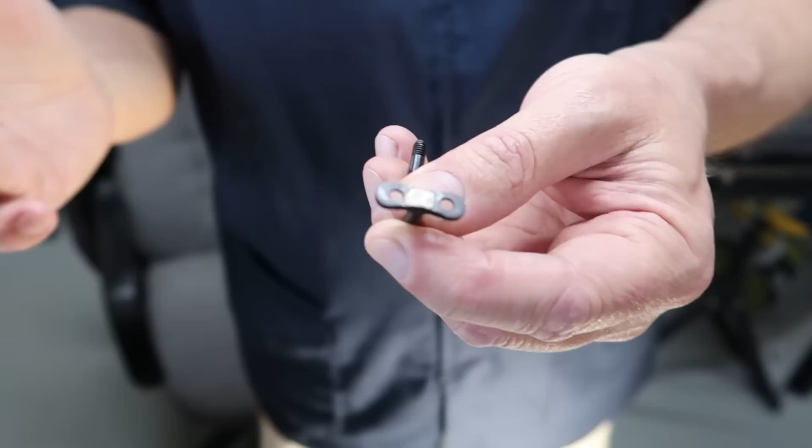So Pat fusses around with some welding brace or whatever it is, firing on it and firing on it. I thought he was going to catch my bench on fire out here. It was so hot, but nothing was working. Don't want to heat up too much. You can always try it again, you know.

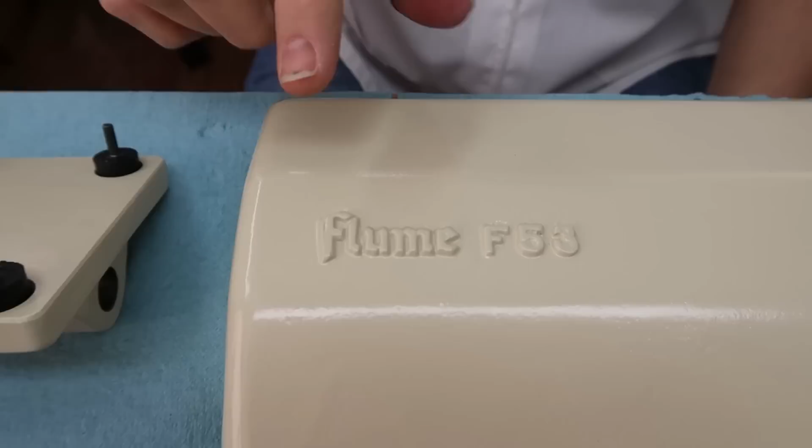Lance has a skill which I don't have, where he's able to paint these embossed letters really well. Patrick saw this first today and said, 'Oh look, we should have filmed this in October.' Boo!

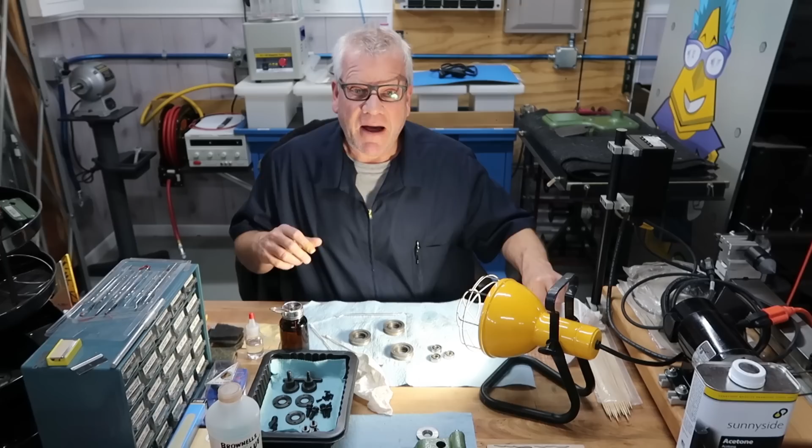Okay, let's see what Lance is up to today. Hey, hi, welcome back. He says you're going to stop by out here. We're going to go over a few things. It's time for a little bit of an update on the progress report for the week here.

Okay, I want to give a little update on some things that's going on. We're always fussing around rebuilding some machines. What's going on? Well, here's what it is. We've been running these machines, doing work for other people for a very long time. Now that we're going to start making our own product, it was time to stop. Actually have the time because we're not being pressed for schedules as much, but we still need to get a product to market, and we're going to build our own product. So this was a big deal to us.

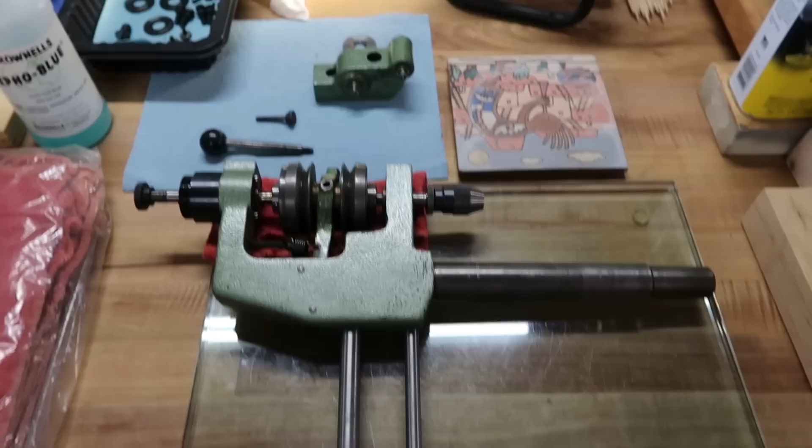In front of me today I have a German - I know, I have another German machine. Look, Patrick buys these things, not me. I'm lucky I'm allowed to touch them. And Levin didn't make one, unfortunately, or we would have it. This is a German-made one. Pat's going to put up the name of it on the screen because there's no way in the world I'm going to speak that kind of German. It's like four words with a big U in the middle. I have no idea, no disrespect.

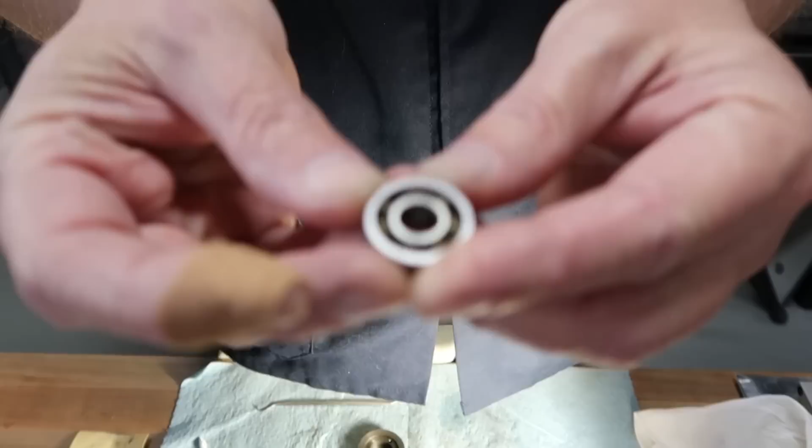This is a micro tapping machine. This is the head of it. He'll put a picture of the machine up as I took it from him to begin the process of restoring it. We're not painting it, we're just going to polish up some things with some Scotch-Brite. We're going to replace all the bearings. We got these out - these are old Fag bearings. They haven't made these for a very long time, so these are obviously pretty close to damn near originals.

So it was time, we've pushed it for all it's worth, and we're making our own new product here. We want our machines to do the absolute best drilling, like the micro drill, and the absolute best tapping. Remember, all these old machines we're fixing up are going to make the product we'll be offering through our website, probably next year, 2019. No rush, we're just having a good time getting to know people on YouTube and enjoying rebuilding all these machines.

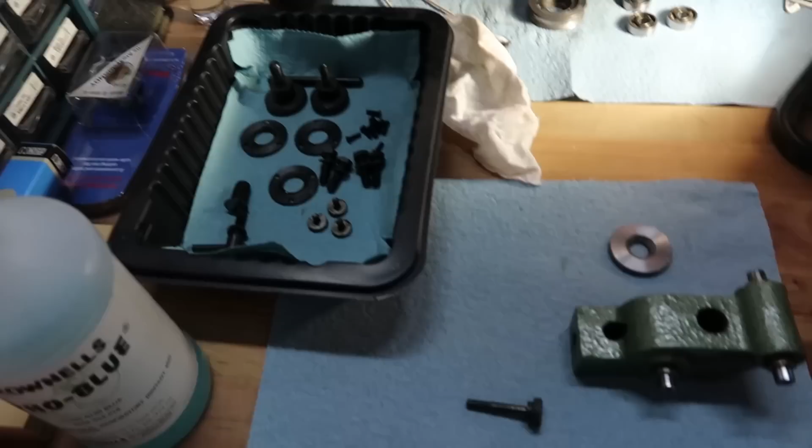So this is what happens. Things come to me, Patrick gives me the project, I start disassembling. Bearings are popped out, parts are everywhere, bearings are on order. It's really amazing.

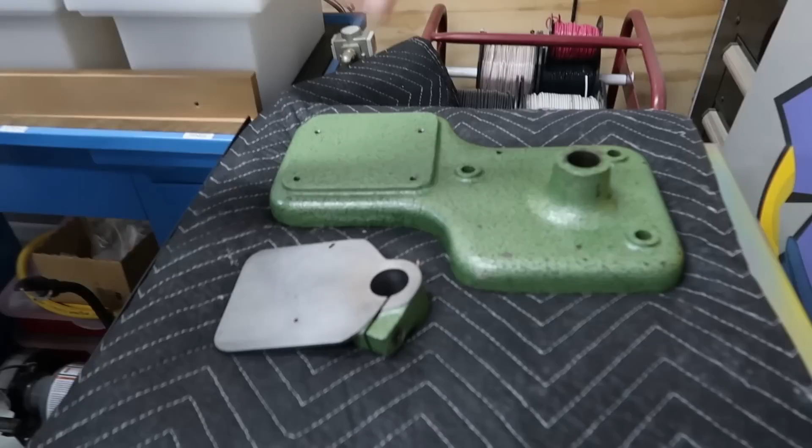Back over here, here's the drill, here's my drill base plate. That goes on the column there. This is my big base plate. Of course, you know what's going to happen here, huh?

See these three holes? I'm going to mount this to another one of those fabulous cutting boards, they call it, although I like to call it a work table board. One of these small boards again, another 12 by 18. It actually fits, I'm waiting for it to come in. I'm going to put the little rubber feet again like we always do, and I'm going to give this machine back to Pat, tapping perfect holes.

We ran into a new problem. It's not new, it's happened to us before, but we get into these spindles. Let me come back to Pat here in the spindle. It's got this quick chuck on the front. We've disassembled it, it's all unscrewed. You think, oh wow, just knock it on out of there, no problem. Oh I know, let's use this like a puller and smash it till this thing pops off.

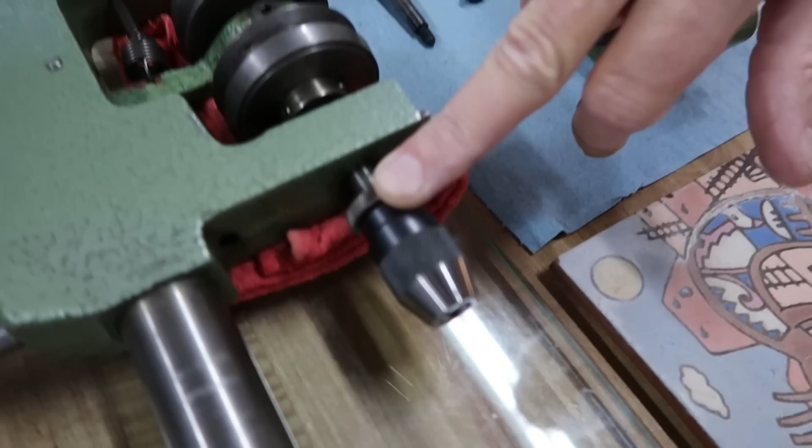We've been here before, here's what's going to have to happen. This is machined, there's a step in here, it's not going to come out this way, so it all has to come out backward. The only way to do that is to take this off. We have all those pullers, as you've seen in prior videos, if you had the opportunity to see them. If not, go back and watch them. It's a pretty interesting way about how we pull the bearings on a Barker mill.

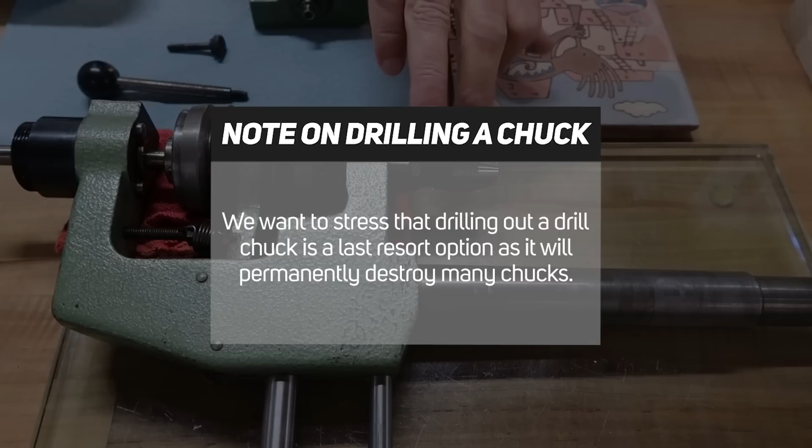So what we're going to do is open this up. We're going to come in and drill this front end here, and then we're going to be able to get this chuck off of here and pull this apart, and we'll start the cleaning up, rebuilding process.

This is that oilite bronze bushing again, no oilers. So I guess we've just been oiling from the top all of our years, but now that we're so into this, we're trying to pay attention to it. Okay, but that's all we got there.

Now I just wanted to share another something with you. Maybe you're just not aware because all you see is a cute little 30-minute video of the two of us telling you and showing the things we'd like to share with you. I'm going to share just one part from a Flume motor. This is one of the two brothers of motors that Patrick's rebuilding right now. In fact, we're going to go to him just real quickly for another update from him when I'm done.

But here's a part for that Flume motor. He brings it out to me and it's in two pieces. So Pat fusses around with some welding brace or whatever it is, and he's firing on it. I thought he was going to catch my bench on fire out here, it was so hot, but nothing was working. This piece wasn't connecting to that piece, nothing was happening. So he dropped back to his tried and true ways of the proper solder.

We're just assuming the solder he tried to use here was probably a California approved product, so I think we used an out-of-state version, and of course it's completely perfect. Okay, so that takes about an hour for Pat to prep these two parts, get them angled perfectly, and solder these two parts. We didn't film it, we probably should have. It's also bent. And it was bent, yeah, it's bent all over the planet.

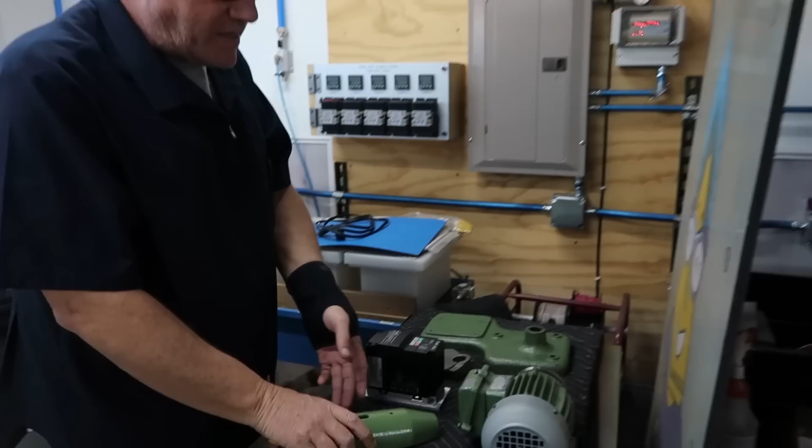I wanted to share a little bit more about this tapping machine. You know, it's beautiful, and Pat's going to put the name up, but we've gone through it. Here we go, a little more. You know, and we said we didn't paint it - we did just one part. We painted one piece, it's a front cover plate. It sits in front, just because, I don't know, we were painting German green that day anyway.

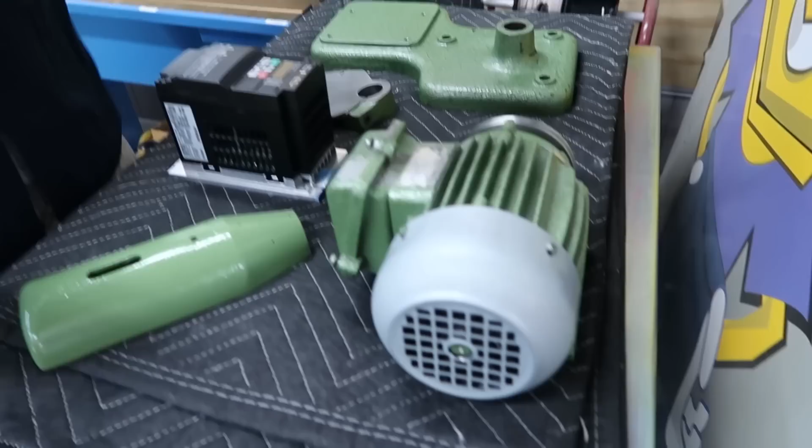Right, this is a motor we forgot to mention. Pat put a lot of hours in it. I found this cover in Germany, actually, from a new manufacturer - couldn't believe it. It had altered a little bit, but it fits. Yeah, the original was plastic, and it just cracked, and it's a beautiful metal one. Yeah, it's metal now. So this motor runs on 3-phase power.

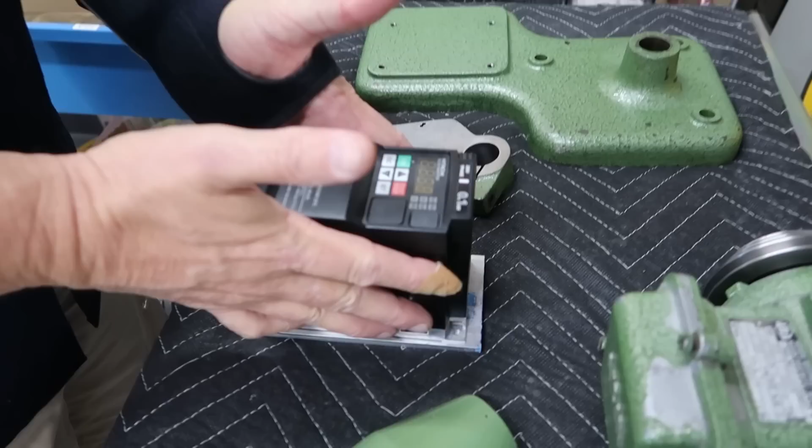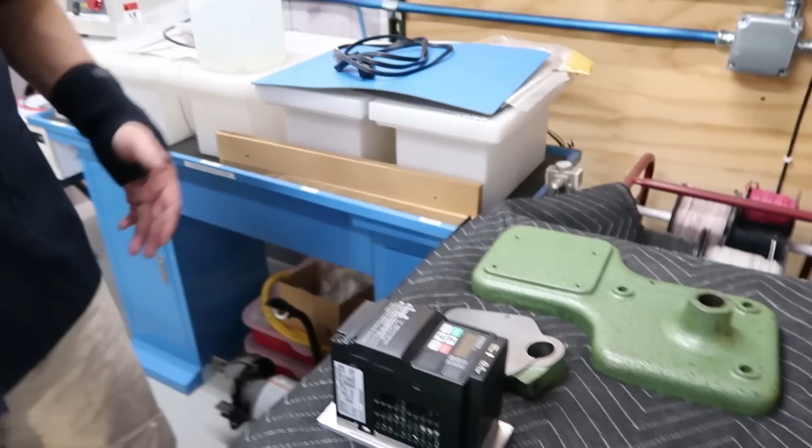Now, we're not going to run it on 3-phase power. By the way, I don't know if you know, we have 400 amp 3-phase service here. I have a beautiful Christmas tree with 3 ornaments on it, better known as 3 transformers. So we do have full 3-phase power on the property. The thing is, in this case, this motor, we're going to run it on just a single phase because we have this - we want to run the VFD, and this is going to allow us to control the variable speeds and give us the speed controls for the motor. So we didn't need that situation here, but we wanted to let you know we do have that 3-phase power for a big future machine we plan to have one day.

So that's what we're here working for. And did I miss anything, Pat? No, I think that's it. So this is everything that goes to - so this is a nice, powerful, and strong tapping machine. It may be a micro scale, but it's got a lot of power. So we're really excited about it.

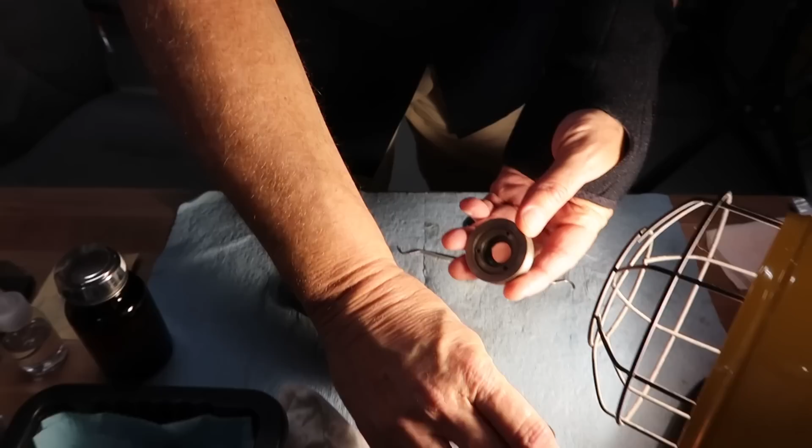Yeah, I'm still cleaning parts. What are these parts here? Well, these are idler pulleys, and these are the ones we pulled the bearings out of. It's only 3 for the belt to ride around, the famous green belt, the fused belts. And that's what these came out of, and I'm just going to clean these up. We got the other bearings to change and all that, but yeah, it's going to be really good.

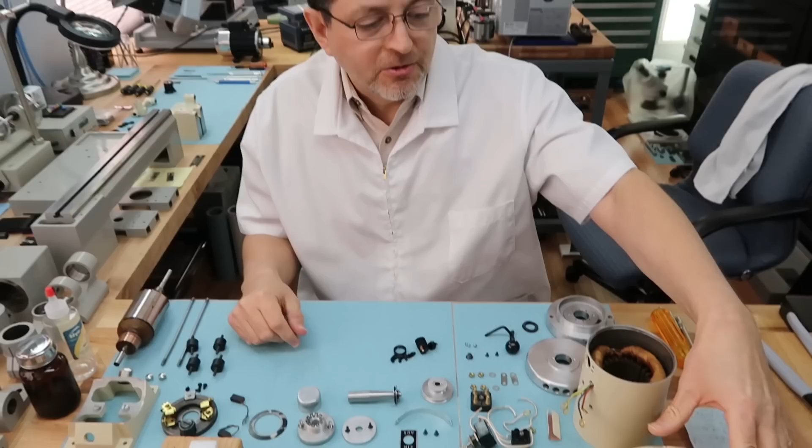Hello, everybody, and we're back to see Patrick about a couple of Flume motors, shall we? Hi, Patrick. Hi. Okay, yeah, if you notice in prior videos, we were working on this Flume Watchmaker base. And if you notice, we did the painting, and we also did a little restoration on the parts.

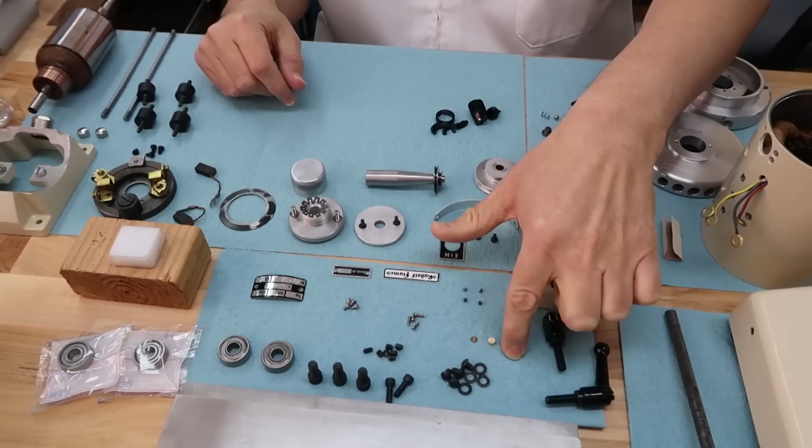We added new handles and made some spacers that we saw were missing. That's actually completed the base itself. The last part is the motor, and that's what I'm working on this week. I just started today, and we're hoping to have it done in about the next day or so, so we can share it with you by the end of the week.

This motor looks more like one of those model kits, look at all those parts. Yeah, this is the most complicated motor we've ever worked on. This is all mechanical, there's no electronics or speed control, and it's a really unique motor.

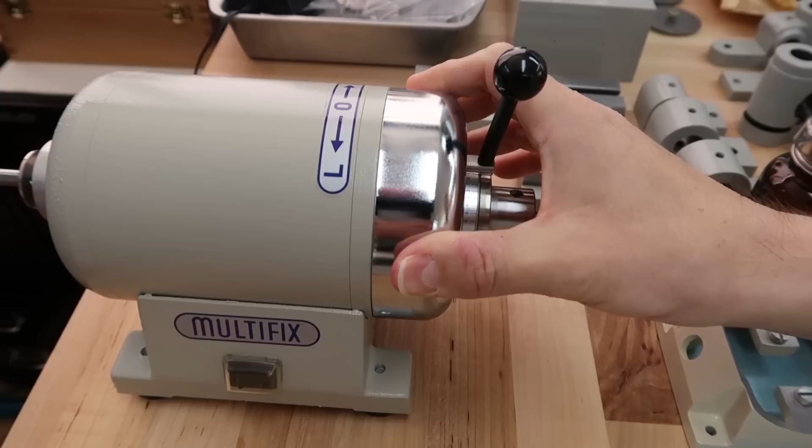The type is a repulsion motor, which is a single phase AC motor. I want to show you an example. This is the same type of motor, just the Flume, which we figure is about 35-40 years old. This is a newer model you can buy today from Bergeon, called the Multifix. It's made in Germany, and what makes this motor really unique is it has speed control, done mechanically with no electronics.

What's nice is it has neutral, like here, and it has forward and reverse. Let me turn it on so you can see it in action.

So we move it forward, and that's moving it this way, counterclockwise with me facing the shaft. It goes pretty fast, I think 5,000 RPMs. Wow.

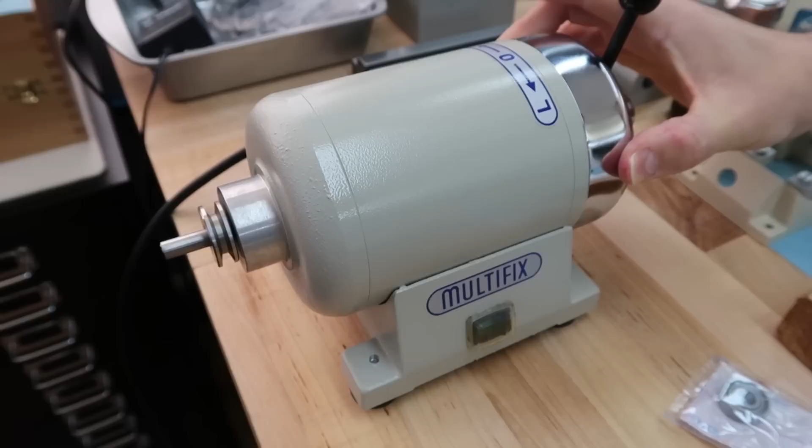What's really unique about this, you'd think a single phase AC motor wouldn't have much torque on the low RPM side. But that's what's unique about this motor, it has really good low end torque for low RPMs, and it's really smooth. You could hear it, it just sounds great. And it's really easy to control.

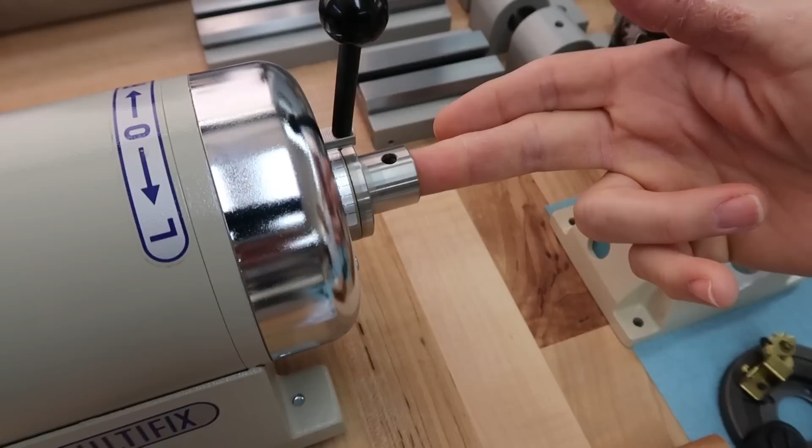It's really nice. The reason there are two shafts is this shaft you'd use to drive your little watchmaker lathe, and this is an accessory shaft. They make accessories, like arbors you could attach here if you want to do grinding or buffing, and you can actually plug in a flex shaft. Yeah, those are neat. We have all the accessories, so I'll have to show them to you in another video.

I just wanted to share that. Sounds like some more stuff I haven't seen around here, huh? Busted, I like this video recording, I get some confessions, it's what they call true confessions. Okay, I'm sorry, back to Patrick.

Yeah, so it's a really unique type of motor. But there is an interesting story about this Flume. Let's come back to the Flume. This has actually been in storage for about 15 years.

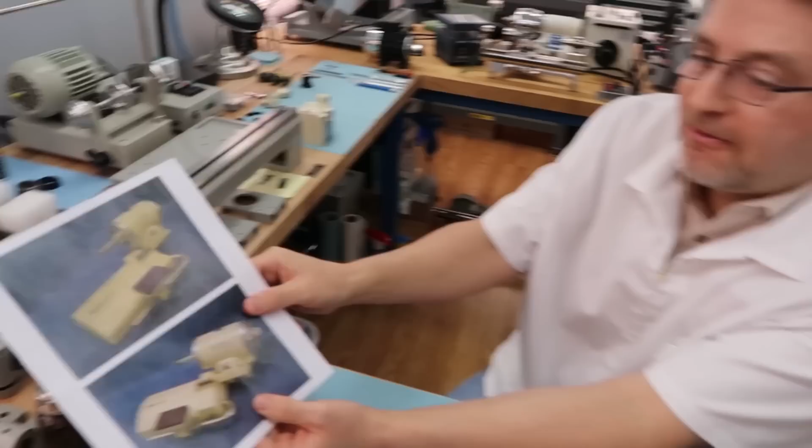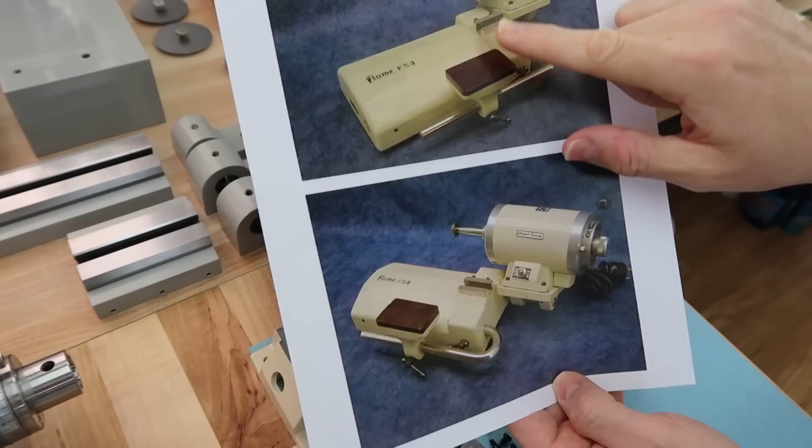We purchased it and ran into an incident, a kind of sad story, but I wanted to share it with you. When we bought this about 15 years ago, these are the photos the seller sent me from Germany. As you can see, for its age it's in immaculate condition, just beautiful. The motor, the base, you've got your little hand rest for working on the lathe. See, the lathe is secured right here, really nice. You can see the close-ups, look at the motor, just beautiful condition for its age.

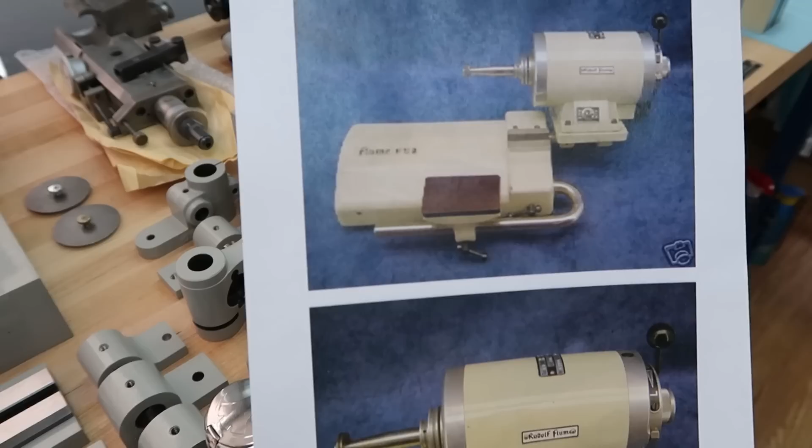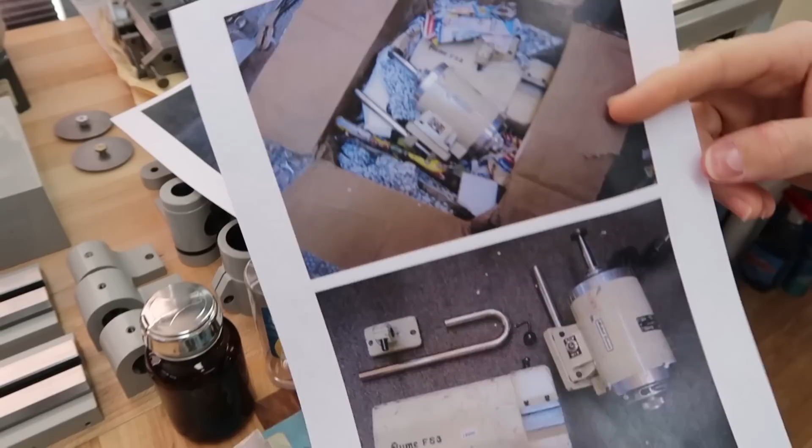But the disaster came when it arrived to us. We were just devastated. The seller didn't spend any time packing it, all he did was throw all the parts in a box with some pieces of newspaper and some foam. Well, that certainly isn't very German-like. Yeah, and it just destroyed it.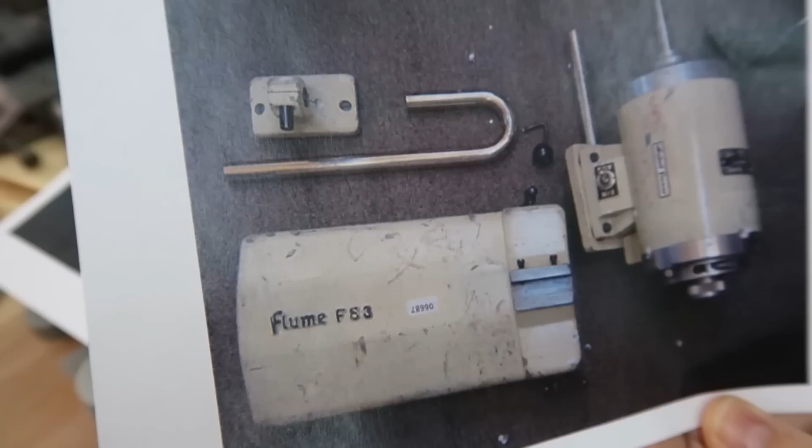Here's a picture of when we removed the parts from the box. Let me show you some close-ups. You can just see it got so banged up, and we were just literally devastated, so devastated. We just packed it back up and put it back in storage, and we just didn't want to see it.

The other thing is the seller ignored us, so we had to file a dispute with PayPal. Fortunately, PayPal sided with us because he wouldn't respond to us, or even to PayPal, so we got our money back. But again, it just wasn't right. We were just devastated, this is an old device that you just can't purchase today. It's devastating, but it is true.

Out of the megatons of rare equipment and tools we've acquired for our own shop over the past couple decades, it's only happened twice that shipping damaged something badly. There was a real rare Bulova wall clock, blue and white, that the seller didn't pack well, and it cracked. A devastating experience. But for the most part, sellers really do care and spend the time to pack properly.

Like we say, it only happened twice out of maybe 20,000 shipments. We've had shipments all around the world - Germany, Switzerland, England, Russia, you name it.

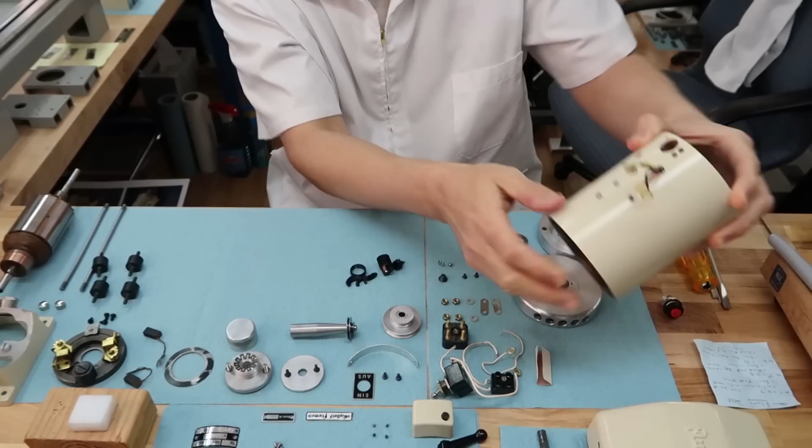So the other thing is, I disassembled the motor. We actually took it apart to paint the housing of the motor, so it looks nice. Those are all the parts I did for you too, by the way. I noticed all the beautiful finishes. Right, so Lance did the parts for me.

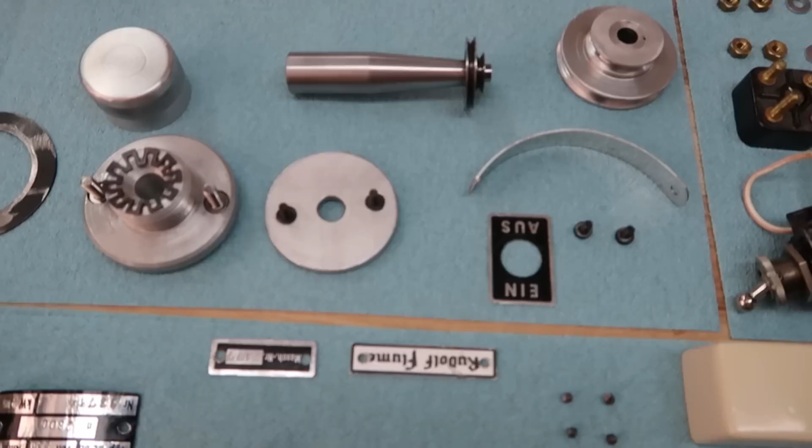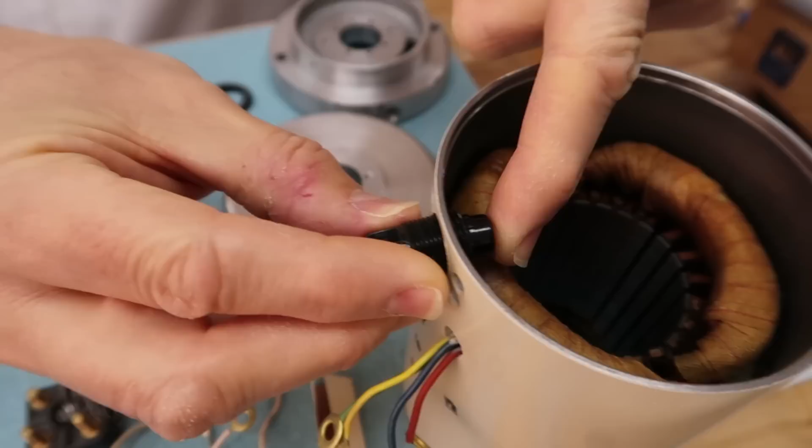When we were going over all the parts, there was a broken part - a little switch. We don't know if it got brittle because of age or if it broke from shipping damage. But the switch actually installs in this motor like this, and when that lever is in neutral, it disengages the power to the motor. So that's the function of this.

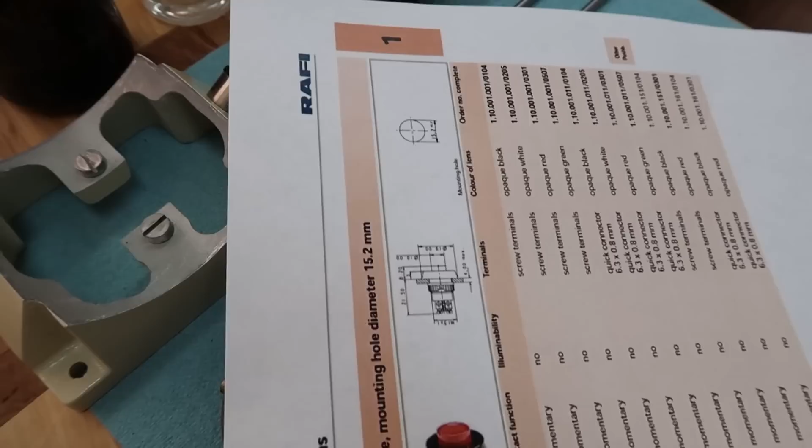My concern was, due to the age of this, I wasn't sure if I could get a replacement. But we were so lucky because I was able to read the manufacturer and the part number, and I found the actual part from a German company called Rafi. They make this part in Bulgaria. What's really interesting is I was able to order it through an electronics distributor called Newark, and they have it in stock in their distribution center in England. So it took a little while, but we were able to obtain a replacement.

And here's the replacement - it's an exact match. The only difference is the old button's black and this one's red. That's all they had, but other than that, it's identical.

We were so lucky because we're actually restoring another Flume motor, which we'll show you soon, probably this week. We mentioned in the last video we were doing a pair of brothers - like a set, they're adorable. That one needed a new switch too, not broken like this one but just worn out. Fortunately, when I purchased this part, I bought 4 of them - when you purchase something, you always buy extras. So I have a replacement for the other motor, and now we have 2 extras if we need them. That's it, I think that covers everything.

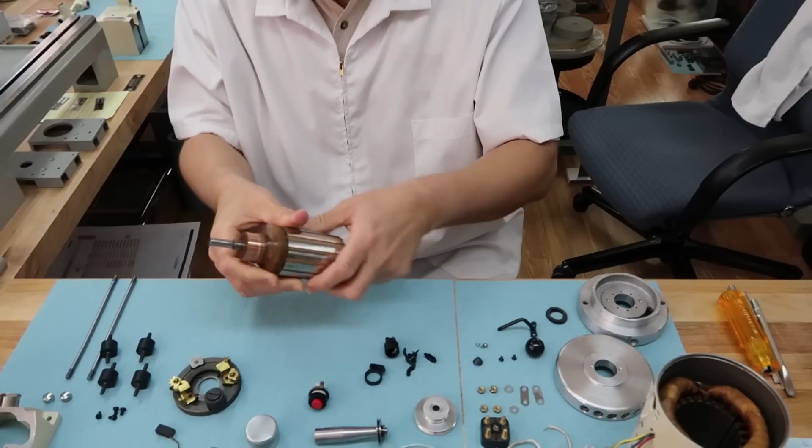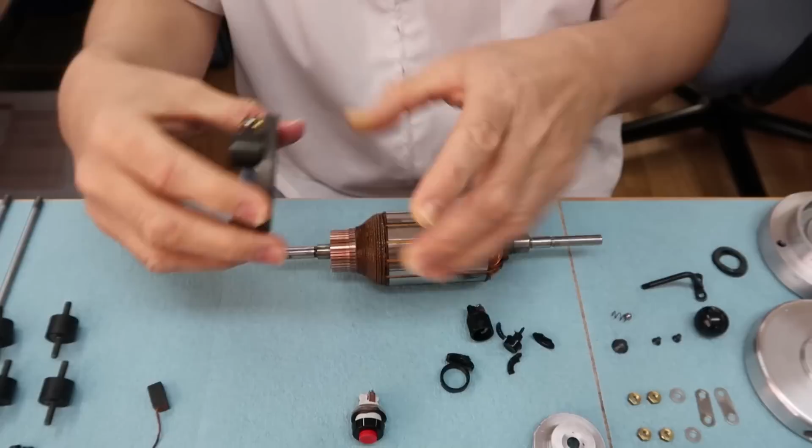Oh, let me show you how the motor works really quickly - just to demonstrate the speed function. Okay, so this is the piece, you've got the carbon brushes, two of them, one on each side. This is what the brushes ride on - the commutator.

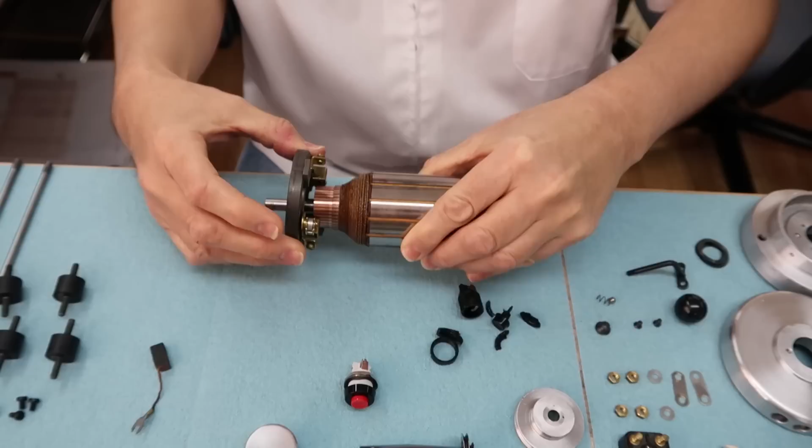What's really interesting, I'm not sure exactly how it works - you'd have to read up on it, it's a really interesting mechanism. But by turning this, it controls the speed and also the direction that this turns. It's all mechanical how this works. So that's how that works, and I think that's about it - as you can see, it's a lot of parts for just a simple motor.

Well, thanks for sharing that, Patrick. That'll make a lot more sense for people when these are all put together - they'll just go 'oh, look, another shiny, pretty motor' but now they know what's inside and what it took to make these, without having one of those controllers. That's nice. Thanks, Patrick. Sure, be back later. Okay, bye.

Hey, hi, I thought we'd jump in and give you a slight update on the German tapping machine - you'll notice there's a big torch in front of me here.

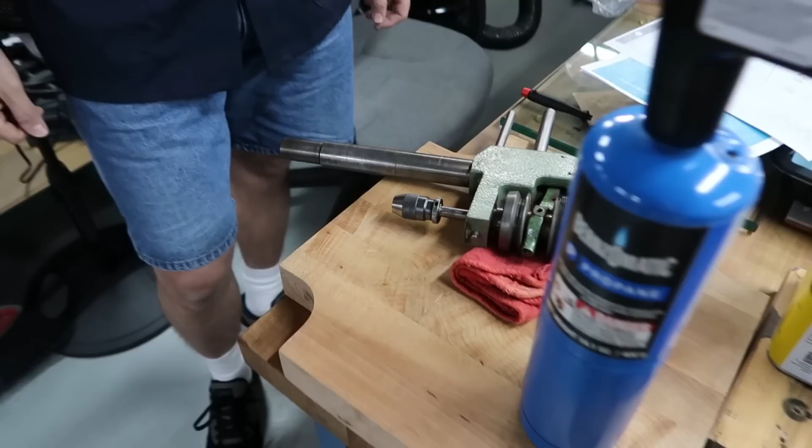We were trying to figure out how to get the Albrecht chuck out of this thing. We want to save this little chuck. We didn't know if this was screwed in or tapered, and Patrick did what he usually does.

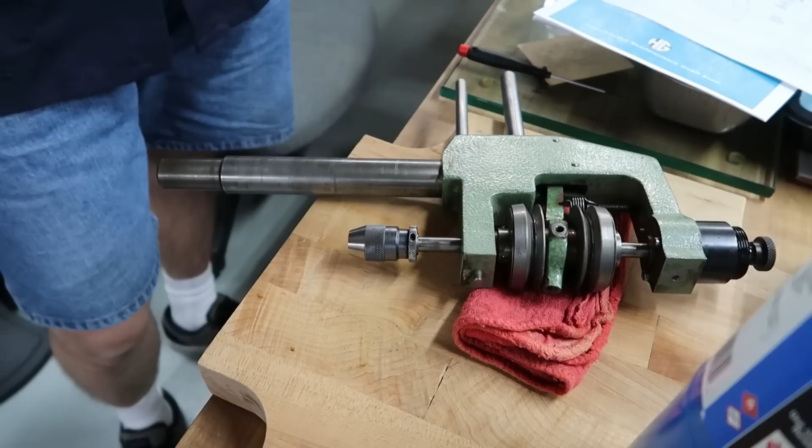We always try to contact companies, all the time. There's a couple companies that are great with us - one of them is Levin and Son, and the other was this German company here, which he'll put the name up on like we've said before. Here's the name of the company. That's who made this machine.

Well, he was lucky - last night Patrick contacted the company, so he's going to tell you a little bit about that. We're going to try to use heat here. I thought he already did, and that's why I'm sitting out here working today on the parts, and he comes out with this big torch, all jumping up and down. So we're going to try to get this chuck out of here, and Pat's going to explain what they sent him.

Hi Patrick. What I did was email the company last night because our night is Germany's morning. I thought, okay, it's a long shot because we've contacted a lot of companies in the past and get a lot of no responses, but you always have to try. So I sent them a kind email saying I have this old model of tapping machine that they made a while back.

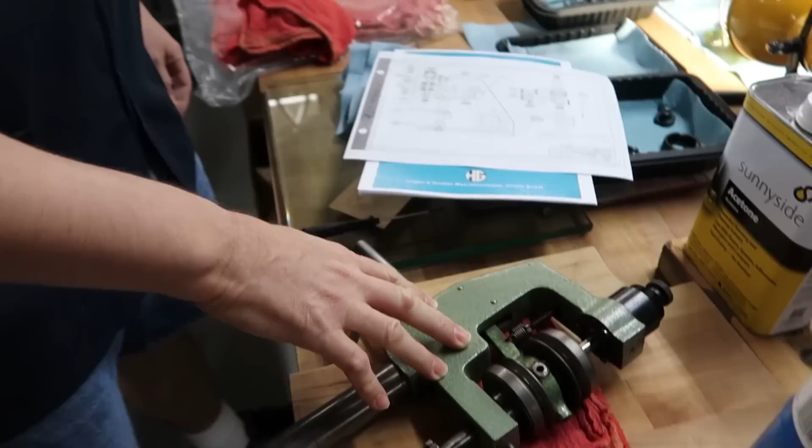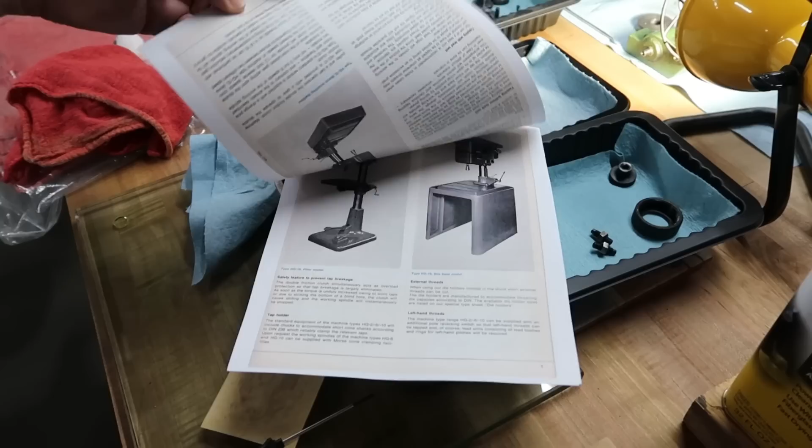I asked them really politely if they have any documentation, a user's manual, a parts diagram, anything to help us do maintenance and restoration on this tapping machine. To my surprise, I checked my email first thing in the morning and they sent me this little user's manual showing the machines and some instructions on its use.

Oh, those are like all their machines from that era, huh? Yeah. The guy even mentioned - he was really surprised, a really nice guy who responded to me - he said 'oh wow, you have an old model of ours,' and he was really happy we were restoring it.

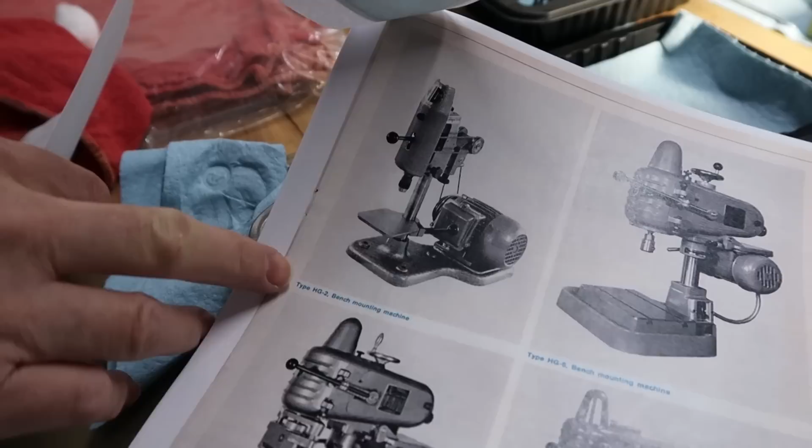Oh yeah, there it is - I see it, look at that. I haven't looked because he just printed this. See, that's the one we own, the HG-2. Well, ours looks just like it - nice, it's exactly like ours. And what was really nice was they also sent us the parts diagram right here.

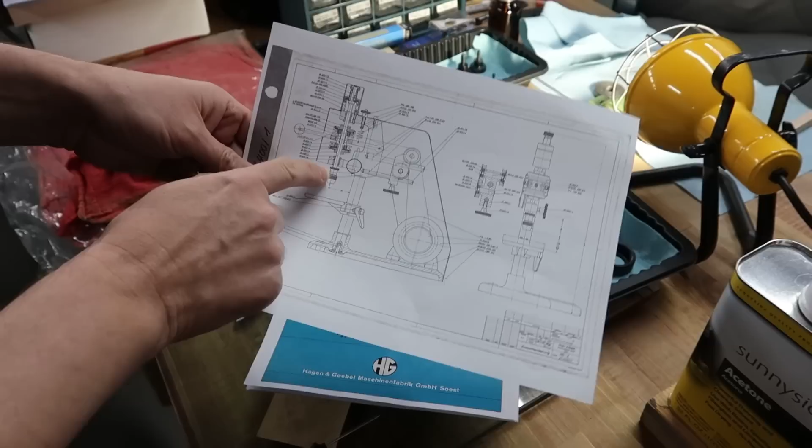One of the things I had asked him was whether the chuck was a taper mount or a screw mount, and that was really important because we don't want to be tapping and pounding on this chuck if it's a screw mount - we've done that before and we'd look pretty dumb.

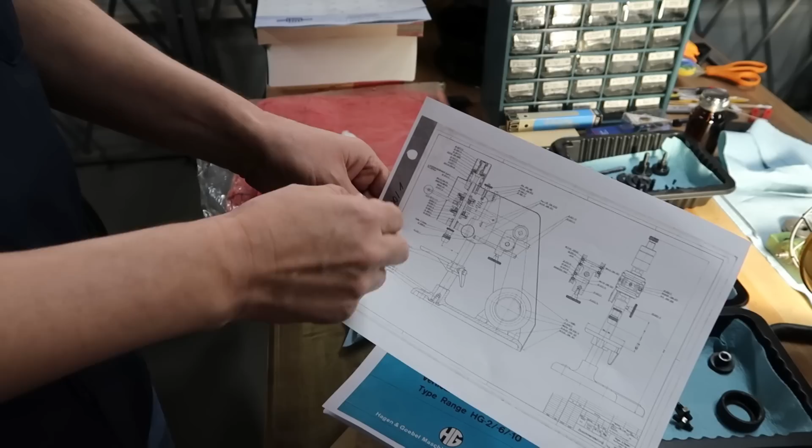So he did confirm, I believe he said it's a B10 taper, because the European or German standards have their own tapers, like we have the Morse taper. Okay, so it's just a small taper - I think it's like a Morse 0 compared to our Morse 1. It's tiny, yeah, it's tiny.

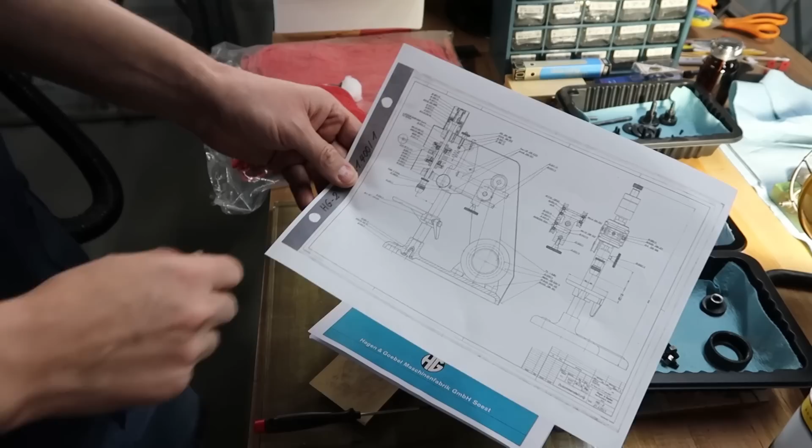Okay, and don't be going Morse 40 on me over here. Like Lance said, this is an Albrecht chuck, actually a 1/8 inch chuck. I think we're gonna try - I talked to the guy, and he mentioned in the email to be sure to remove the screw in the chuck, which I did.

The screw's right here, so I removed it, and he said try applying heat. So this morning I cleaned up really well, put a little bit of penetrating oil, like I always try - anything helps. You completely removed that screw because I can see down the hole, so you did what he told you.

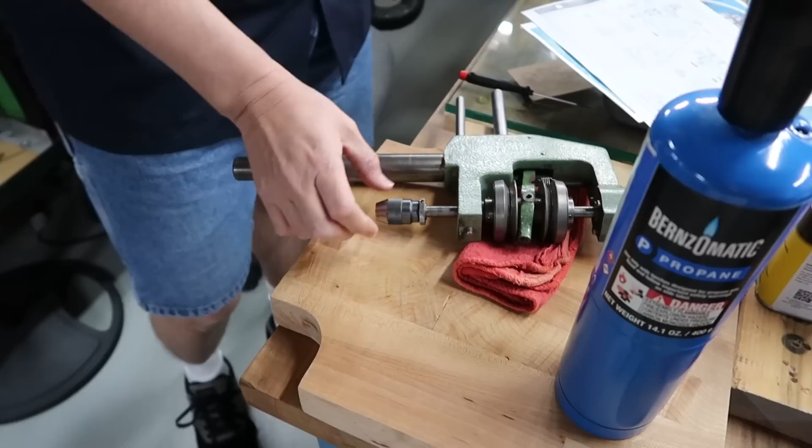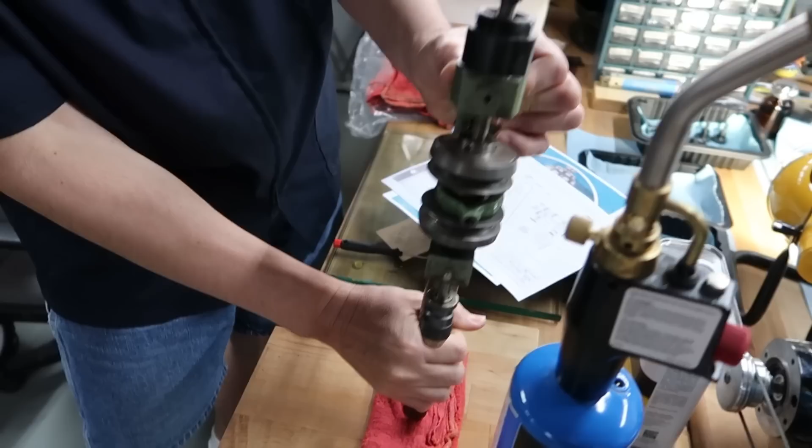So what we're going to do now is, he said just heat it up slightly and see if it'll come out. I'm going to heat it up a little, rotate it from up here with the torch, and then see if I can knock it out by pulling up, like a bearing puller. Let's give it a shot.

Come on baby, save us some time. I don't want to drill you. I can feel me some heat. Don't want to heat it up too much - just snuff it. We can always try it again, you know.

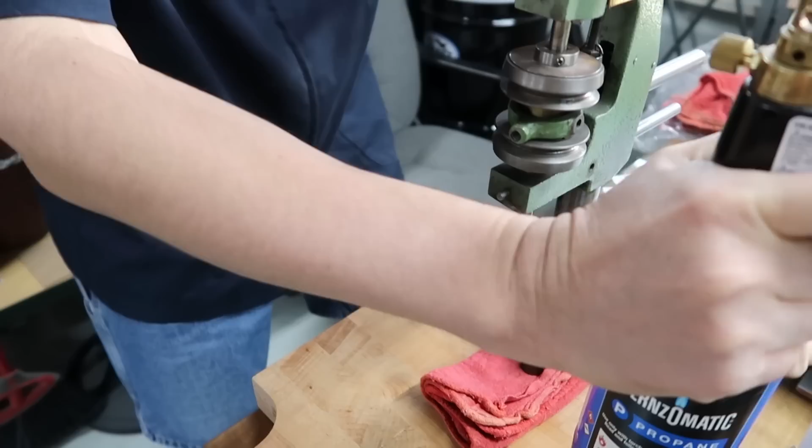I gotcha, go ahead. Oh my God, that was too easy. Oh wow, that looks like we staged it. Yeah sure, that never happens around here.

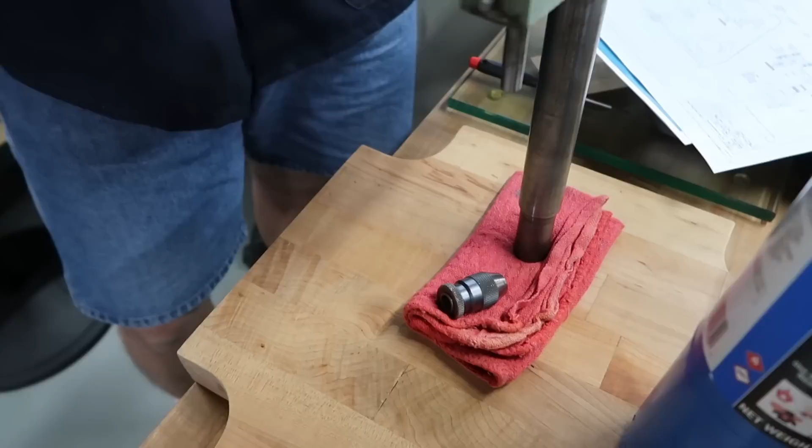I'm telling you, this was on so tight. You saw me yesterday, I was out here pounding on it. Boy, that was too easy. I bet it's a little hot right now so we won't be touching it, but that's neat.

Look at that, it came apart. So now we get to take the rest of the spindle out. That's what we'll go on and move to next. Good, that's not too hot. We got bearings in there to replace too.

One nice thing about the diagram is it tells us there's 2 bearings inside these pulleys, 6002 bearings. And I think that's it. That's it, Patrick? Wow, I'm really happy. Congratulations on that easier job for the day.

So I'm gonna get out of here and go back to my Flume motor. Okay, and I'm back to work cleaning up this beautiful tapping machine. See you later, okay, bye. Bye.

Okay, as promised, we're out to see the smart one, Patrick, on some updates. The last video I shared with you, where we have 2 Flume motors, I was supposed to wrap up this week by the end of the week. And we have good news and so-so news. The good news was actually great news - I did finish one of the Flume motors.

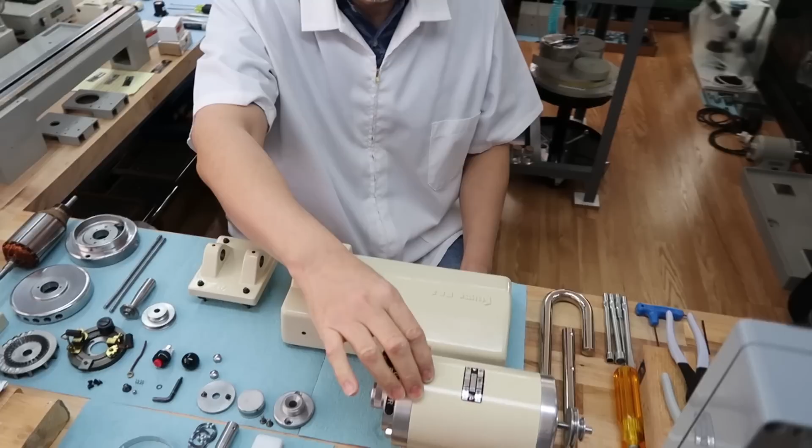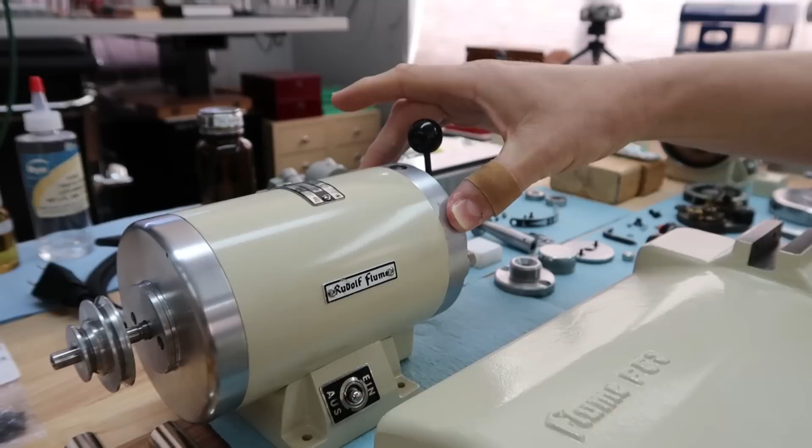If Lance can come around, because I'd love to show this off. Okay, this is the Flume motor and base. This is the one that was damaged during shipment, and I showed you guys a picture of it. Both of these were in really bad condition, and it just came out so good. We're just so happy with it. It runs beautiful, we couldn't be happier with it.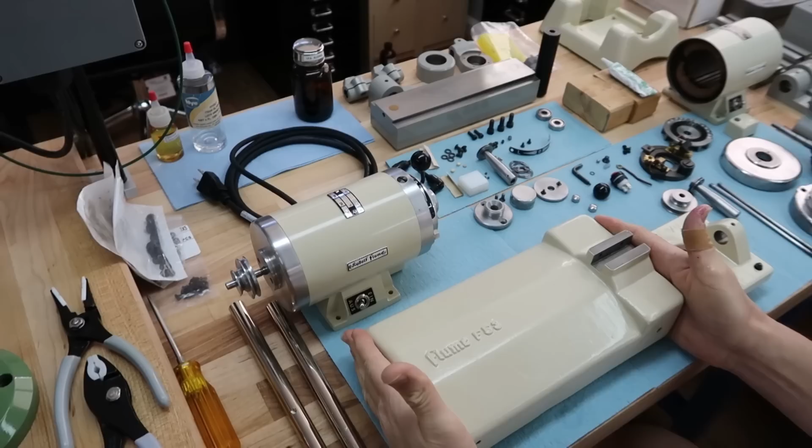Just to update you, this setup consists of this base, and the lathe is clamped in here. Then this motor actually sits on this platform, and with one of these bars, the bar inserts into the base, comes around, and holds the motor right here. I think this motor, yeah, it has to go the other way. No, that's right, I think it's like this. I forget, yeah, that's right. This is right. So you control the motor and it drives the lathe, and then you have another bar with a rest, and that's like a little hand rest that helps you when you're turning.

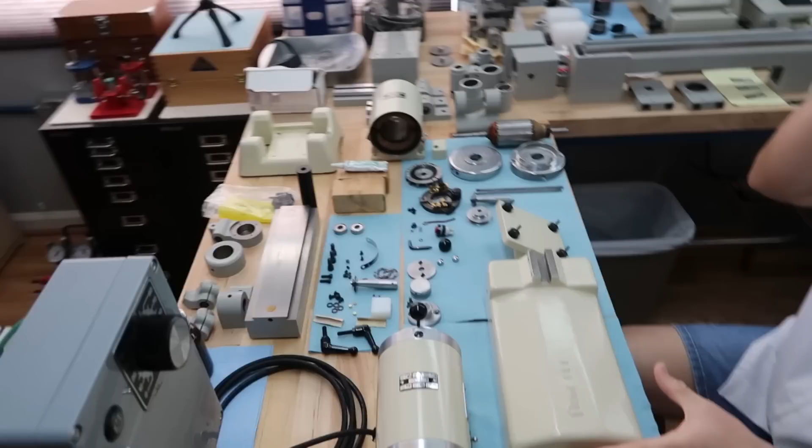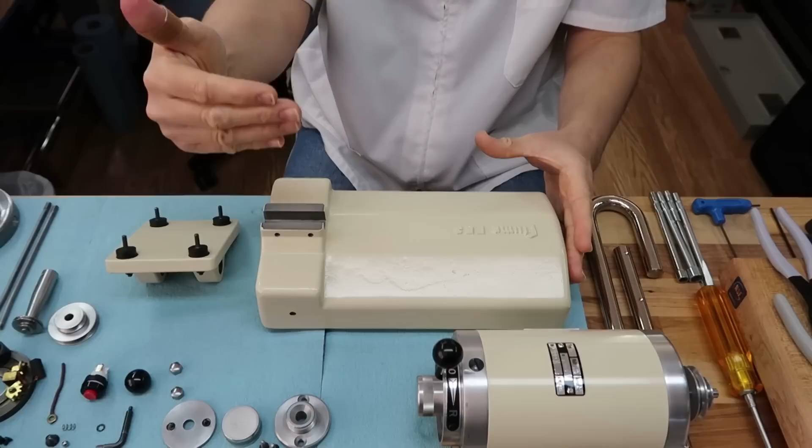Right now there's actually 2 configurations in using this, and it supports both. You'll notice the way it sits right now with the lathe clamped - I'm gonna go back around here for a second, just because I see 2 of these machines here. If you notice how this is sitting right now, if I had a lathe clamped right here, it's actually the wrong way as we would typically look at a watchmaker lathe. But that's actually - I think you call it a left-handed lathe, or it's where the headstock's on the right-hand side and you work on the left side.

A lot of the old watchmaker lathes, the D-bed lathes, guys from a long time ago, European, they were in this configuration. I forget, there was a reason for it, why they worked in this manner. But it actually works in both configurations - we can turn this and just use it just fine, just this way. You know, typically we have the headstock on the left side and we work on the right side. So that's the reason why you don't see it assembled yet - I'm 100% done with this.

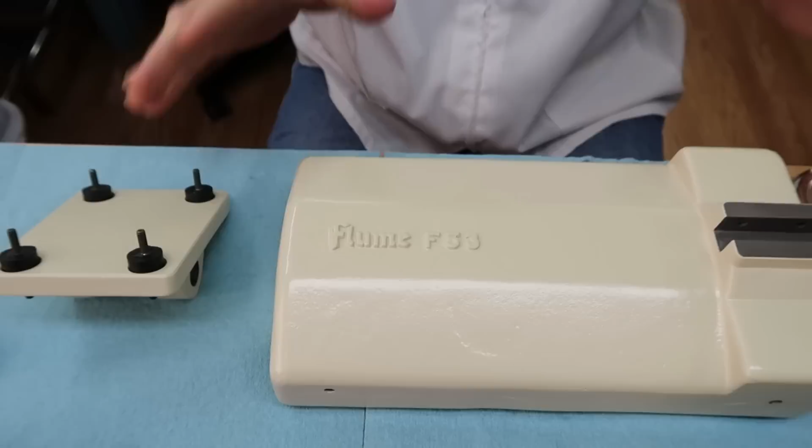There's nothing left for me to do, except Lance has a skill which I don't have, where he's able to paint these embossed letters really well. He has a good technique, and after this video we're going to go to the machine shop, and I'm going to be filming Lance showing you guys the process he uses to paint these embossed letters. He used to do it the old way, using a little paintbrush, and he'll show you that.

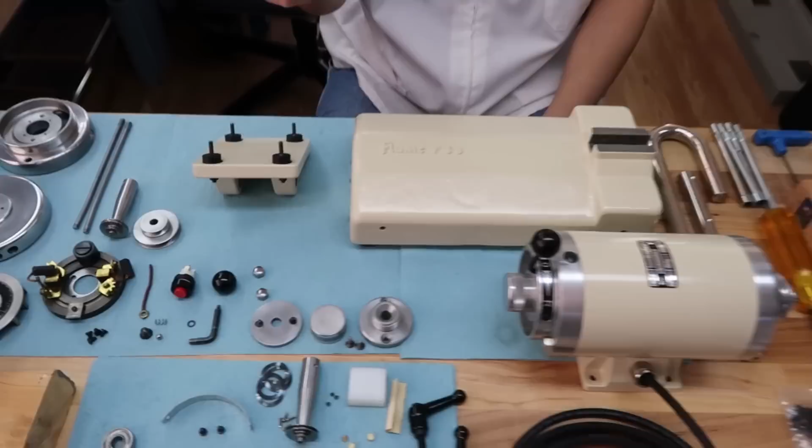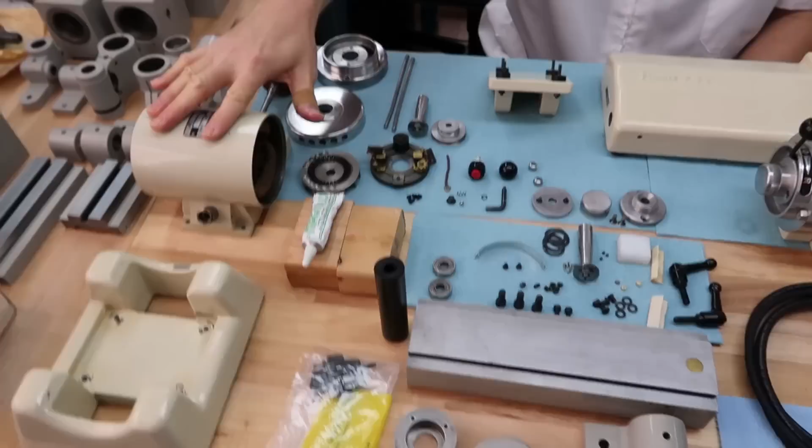I noticed that there's one all assembled here, and there's what looks like one kind of exploded here. Two flume-looking motor things - this is the brother we talked about earlier. This one was supposed to have been completed already, but the problem is we're still waiting for the bearings, the new bearings. We were supposed to have gotten them on Friday, but UPS delayed our shipment, and now we won't get them until Monday. Welcome to rural living. So that's why it's sitting here.

Everything's completed, all the parts have been refurbished and cleaned up, and this is a little unique. This is the same motor as the one that's assembled here that you just saw, but instead of having this base, it has this little standalone base, so it actually sits in there. Oh, it's a little house.

Sometimes we'll use a little tiny lathe that's clamped into a vise, and that's really nice - we'll clamp a little lathe into a vise, and then we can just carry that and place it behind the lathe, and it's perfect.

Okay, and I know we're out here for one more thing, and I'm only asking because I get tired of being asked about it. I know when we first started this channel, we did something, and I guess we got away from it, so why don't you share where we're at and where we're going, because I'm really excited about it too.

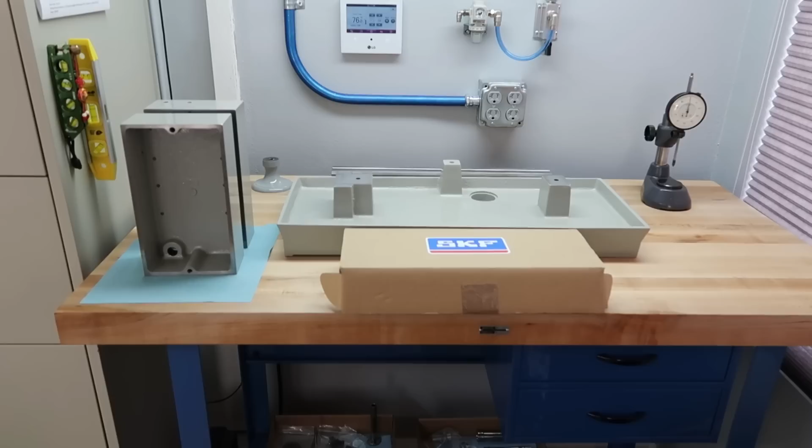Let's try, want to show that? I think I can. Oh yeah, see, that's a Levin table, the one we put the new top on. That's right. So the other lathe is going to be installed there.

Before we do that, next week we hope to start rebuilding the headstocks. Here's one of the Levin headstocks, and what's really unique about these is they're very high precision - the TIR, or total indicated runout, is 50 millionths of an inch. Holy cow, that's half of 1/10,000th of an inch for anyone counting - that's a lot of zeros before that little 5.

It's incredible. That's the internal runout you get from the factory if you purchase this brand new. Since we're rebuilding this, in order to achieve those same specifications there are techniques, and we're going to share everything with you.

Here I have one of the spindles - look at that, it's a spindle for a 10 millimeter D collet size. We also have a 3C collet spindle, and also a WW 8 millimeter spindle. So we have a lot of Levin.

We're going to be doing 3 headstock rebuilds, and some rebuilds on these little tiny spindles, like for our grinding spindles and our micro drilling attachment. So we're going to be doing a lot of rebuilds, and we're going to share everything with you, but it's really a step-by-step process.

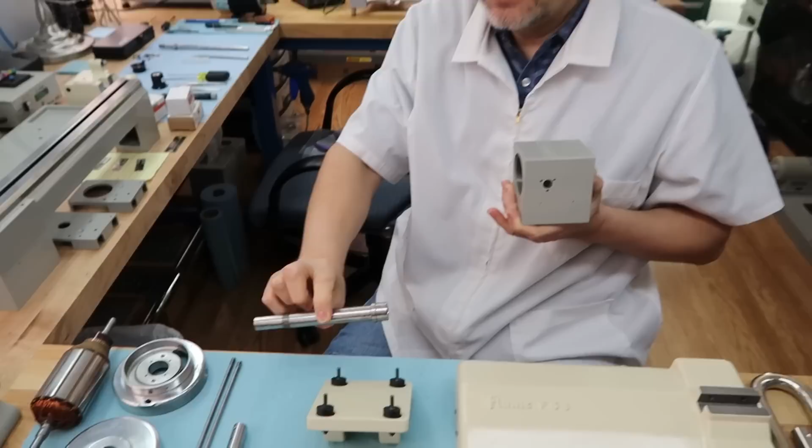Everything from taking this to the surface plate, and marking the high spots - because nothing can be machine perfect, everything's going to be a little off regardless of how high precision it is. We're going to have to put these on some V-blocks on the surface plate and mark the high spot of this spindle.

Then I'm going to show you the special bearings we use - Angular contact bearings, ABEC 7s, which have special markings, and we're going to show you how you align those markings with the markings we put on the spindle. We're going to show you the special grease you have to use, and after you're completed, you have to grind the spindles, grind the collet seat, and run a special run-in procedure.

Isn't it true that there's a lot of spindle rebuilding on YouTube? One of the reasons we started this YouTube channel was to show how you do micro machine rebuilding when it comes to spindles, because it doesn't really exist on YouTube as of this date. So that's the reason we're here. There are some spindle rebuild videos, but they're all larger machines, like a Bridgeport mill or larger lathes. But we can't find anything on my favorite lathe, the Monarch.

Monarch 10 EE, yeah, that's one of our wish lists. I have a dream. So we're going to be showing you a lot, and we're really excited to show this procedure off, because a lot of people we've talked to have been looking forward to it for a while. So pressure's on Patrick. Can he pull it off? Can he hold those tolerances?

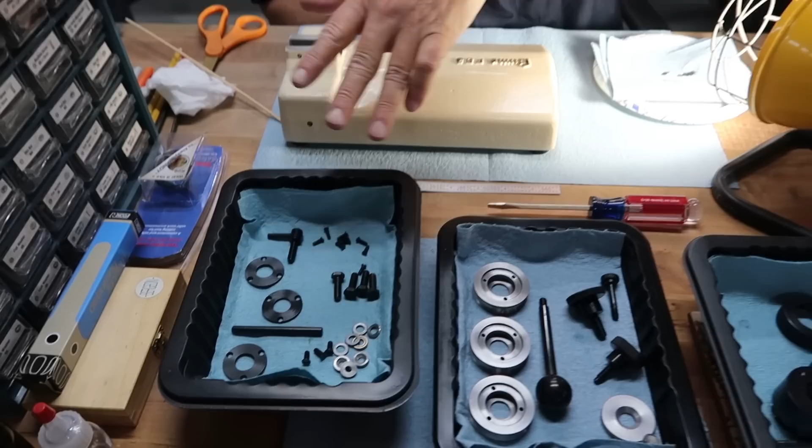Oh, by the way, speaking of nothing to do, in front of you looks like a bunch of Petri trays. Poor man's Petri trays, but they are what they are. These are part of the German tapping machine, and you'll notice that this beautiful cold bluing was done. That's how my Saturday night date went, I spent my whole night out here in this machine shop, and I got all this blacking done, the bluing done, whatever you want to call it, so that we're ready to start the reassembly with brand new bearings in that tapping machine.

I think this is dry enough. Pat, you want me to put the second coat on? Yeah, sure, go ahead. We'll watch you, more pressure. Yeah, thanks, I hope it's looking good. I love the color combination.

Ooh, and you're just going very lightly? I'm just barely tapping the surface. This is a hard wound, there's not much flexibility going on here below that rubber band, a little bit though. You don't want to go pushing too hard because you're going to start wrapping it down the edges of the letters, and we just want the tops, the very, very tops. You're just making a decorative top, and it's just a pleasure to run a machine that has that kind of pride put into its final finishes. And gentlemen, ladies and gentlemen, that is a finish.